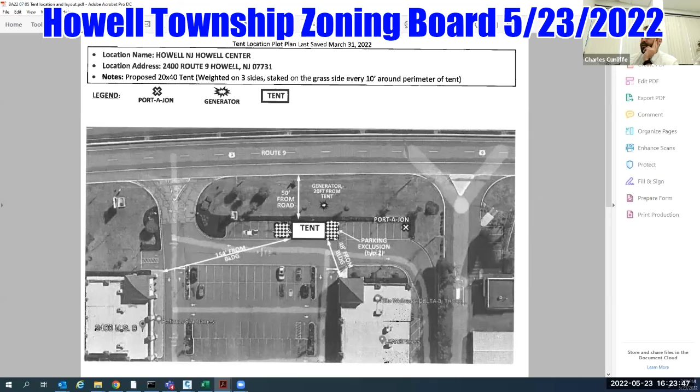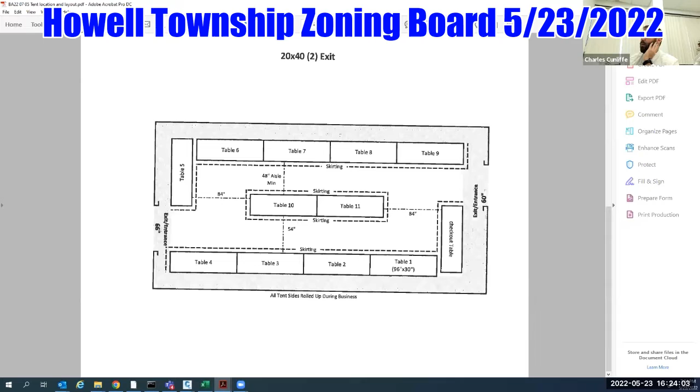So I've just traced the boundary of what the applicant provided, a schematic plan showing where they're blocking out for their tent and then 2 additional parking spaces. This layout, I looked back at the prior applications received for the bowling lanes and also at 19 Petroleum up on 33 and Colts Neck Road. It's a very similar layout, virtually the same footprint that we saw at Howell bowling lanes. Similar to Howell bowling lanes, they blocked out a number of parking spaces.

Looking back at aerial imagery from Google Earth in the last 10 years, I couldn't find maybe one instance where there was more than 1 car parked in this eastern parking bay. So I think this is an appropriate location. If it was internal to the site, it'd be a little bit more questionable.

I would just ask that the final location, it's hard to tell here, but I believe there is an ADA parking space, that the applicant just confirm that the location of the tent and any blocking doesn't prohibit the ADA access. Can you agree to that as a condition, Mr. Middleton? Yes, absolutely.

And then I just want to clarify, I think there was testimony regarding 24-hour security. So 24-hour security is being provided. There's no separate storage container in one of these parking stalls that's going to be utilized at the site. Is that correct? That's correct.

Okay. And then just to clarify for the board, I think Route 9 has a 100-foot right of way. So 50 foot from the center of the median, I think takes us right around where this yellow line, this is GIS parcels, the applicant's location of the generator is somewhere around here. So they agreed to the condition. It looks like they have ample room, but I think that just satisfies it and covers it from the board's perspective regarding any recommendation just from traffic safety.

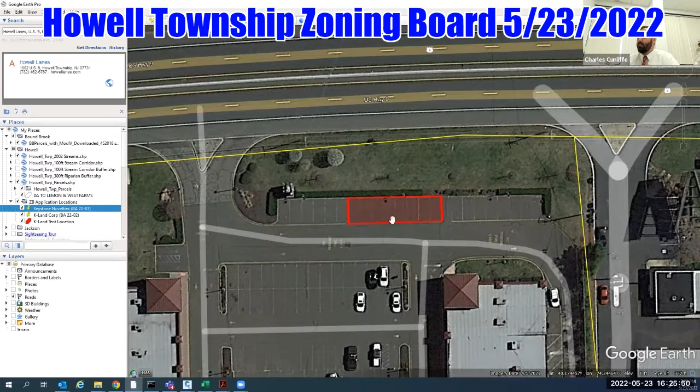I will note that the fire official did issue a letter. Standard comments he's had on the last couple submissions, compliance with the state and federal fire code, fire extinguishers being required inside the tent. The one comment he did is just reviewing this as part of his due diligence, just to make sure that there's no access issues as far as fire for trucks and deliveries, because I think the circulation here is the main circulation through the back of the building for deliveries.

So the fire official might ask for a concrete block that you've seen on temporary seating outside of restaurants or something like that, just for traffic safety perspectives. You don't want a truck driving into your tent with all your fireworks inventory. So I just ask that be made a condition of any recommendation.

And then the last thing, it's sparklers, correct? There's no projectiles that are being sold from the site? That's correct. Using the language of New Jersey law, it's sparkling devices and novelties.

Okay. And then just the last point of clarification for the board. So under 188-165, we're not granting an approval, we're making a recommendation to the governing body. The governing body would then consider the granting of the temporary use permit for a period of 2 years. At the end of that 2 years, the applicant's entitled to come back to the board. We review it again and could make a recommendation for a subsequent 2-year extension to that permit.

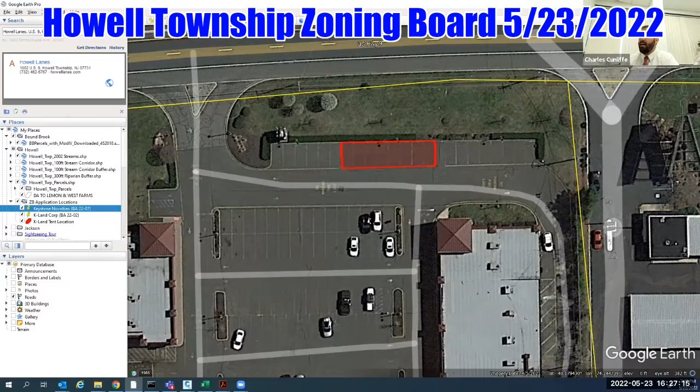So what we're considering tonight is just a recommendation to the governing body for a 2-year permit, and the governing body would be the one that issues the permit based off of our recommendation. So that's all I have, Mr. Chair. Thank you, Charlie. Fellow board members, do any of the board members have any questions at this time?

Just one, Mr. Chairman. Go ahead. 24-hour security, where does that person stay when the place is not open for the public? Inside the tent. Is the person armed or unarmed? Firearms, we don't have a policy. Generally speaking, they're unarmed. I'd be concerned that there'd be somebody armed on the site.

Is that inappropriate, Mr. Chairman? Well, if a permit is issued, law enforcement is well aware of it, and they know when the site is in operation. And so I believe a 911 call would suffice should something like that come across. Okay. Thank you. That satisfies my concern. Okay, any other board members?

Yeah, Mr. May, how was it handled before? Because I didn't remember it being 24/7 security. Is that the way it's always been? Yes, the last 4 years of operation. Okay. And generally, of the 40 tents that we operate in New Jersey, probably 38 of them are 24-hour security.

And I guess that's to alleviate the idea of having to unload everything into a storage thing for the night and then have to unload it again every day. Is that it? Yeah, and an unsupervised storage container is not as secure as a 24-hour security. I concur. Thank you.

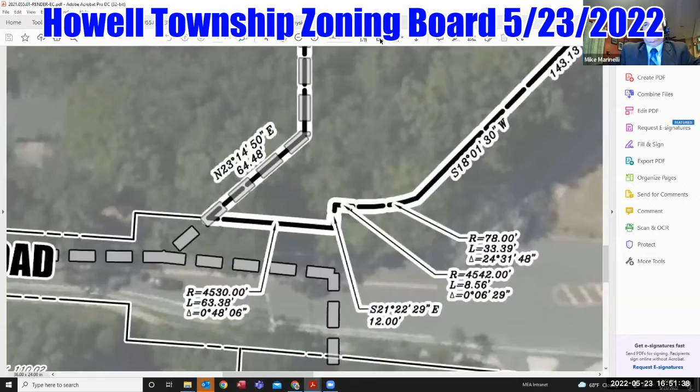Could we go to your next exhibit, the site plan on the aerial? Thank you. And here, in an executive summary fashion, just describe the project. No details, we'll come back to details. Surely. So the applicant proposes a three-story, 79,089 square foot self-storage facility. The building is approximately 40 feet tall.

We've provided, as I said, access off of Sunnyside Road via a 25-foot drive aisle with 20 90-degree parking spaces, and one-way circulation around the eastern, northern, and western sides, which would access loading doors for the self-storage facility. You can also see we've penciled in areas for infiltration and detention along the south and eastern sides. And we've maintained the wooded area along the northern and western sides where there is a 50-foot residential buffer.

If you could take us to your next exhibit, I believe the site plan itself. Am I correct? The amended site plan? Oh, thank you. Board members, during the course of reviewing this project with your professionals, we learned that the footprint of our building was creating variances that could be eliminated if our client reduced the size of the building. Mr. Marinelli, using that red line drawing, if you could just describe the footprint revisions, and then with permission, we'll go back to the colored site plan to make the balance of the presentation.

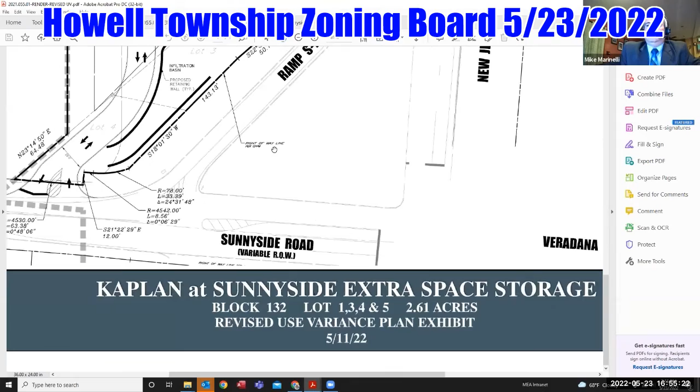And so we took the opportunity to revise the site plan, and now I'm referring to exhibit A15, which is again the revised use variance plan exhibit dated 5/11/2022. If we were to reduce the footprint of the proposed self-storage facility 5 feet on both the north side and the west side, we would be able to bring all disturbances and amenities, including the catch basins, the fencing and the perimeter landscape, out of that 50-foot residential buffer. That building would total 73,839 square feet, which is again 3 stories over a 24,613 square foot building footprint.

Mr. Marinelli, thank you. And to the board, please consider the applicant's request to be so amended, and please consider the revisions shown by Mr. Marinelli to be part of the commitment of the applicant to the board. Now, if we return to A16, knowing that there's a slight dimensional change that will be on the final plan, if you could use this to take us through just a couple of things I'd ask that you focus on.

One is that if you could confirm that you've spent some time working with Mr. Charlie Cunliffe on the stormwater, and that it's your understanding that the conceptual stormwater design that you've presented is in fact acceptable to his office. That is correct. And at any time, if Mr. Cunliffe wants to jump in and comment, we certainly will take no umbrage.

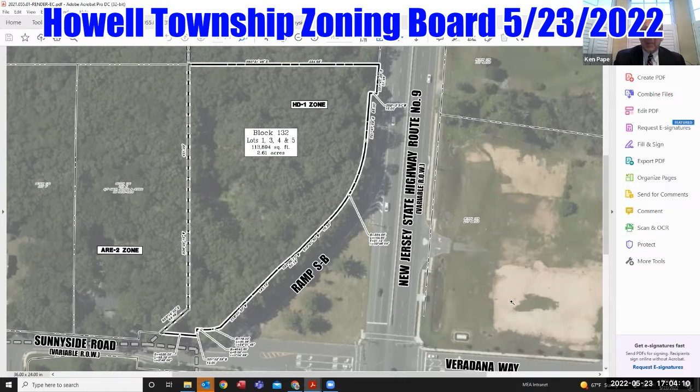And Mr. Chair, our goal is to landscape the property wherever possible with enhancements to the buffers and to landscape around the perimeter. And to the extent that we can do that in a responsible manner, that is our goal. To the extent that there's greater trees required to be replaced, we would ask for permission to participate in the tree fund. Thank you, Mr. Pape. Thank you. I mean, that's a waiver, Ken, so you're gonna have to formally request a waiver to go into the tree fund. It's not just 'we're looking to'; you have to formally request a waiver. The board has to approve a waiver for you to pay into the tree fund.

Thank you for the clarification. I would indicate if this project progresses to site plan, and we hope that we earn that right, we would agree to do the formal woodland management plan, calculate the trees, create a landscape plan, and request a waiver for that which didn't fit. If I may proceed, Mr. Chair? You may proceed, Mr. Pape. Thank you. Michael, knowing that Carl Penke's coming up, if you could briefly describe the on-site circulation system, the locations of parking, and the locations of building loading. So before we get there, Ken, can we talk about the buffer requirement that you do not meet, which is along the frontage of the property? Sure.

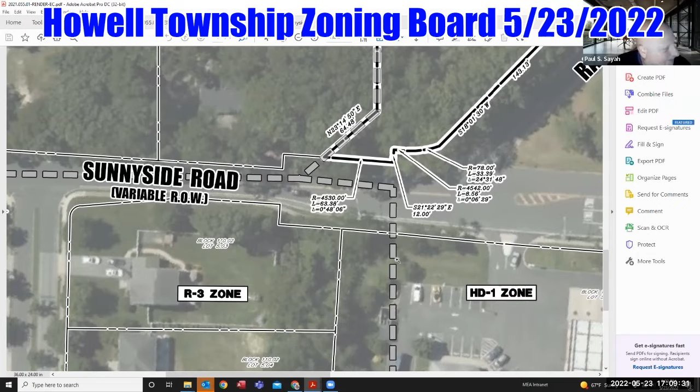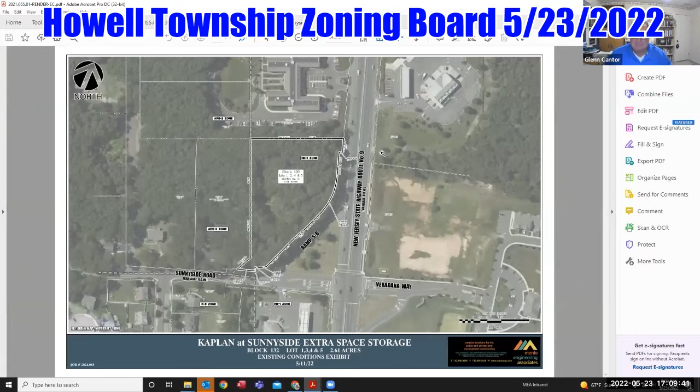Board members, I just want to make sure you're making note of both of those technicalities. I'm good with them. Thanks. You're welcome. So noted, Mr. Chairman. Mr. Pape? Chair, if I may return to Mr. Marinelli. You may. Good. Mr. Marinelli, we were just very briefly to grade this site to accommodate the development. If you could just give the board an executive summary of what's necessary to prepare the site.

So as I said before, the site in its existing condition is relatively flat, and because we're putting in a footprint in the center of the site, we wouldn't be drastically changing grade through the site. As far as circulation goes, there's a full access two-way 25-foot wide drive aisle that accesses Sunnyside Road on the southwest corner of the site. That driveway heads north to the front of the building, where you make a right turn towards the east. There are 20 perpendicular 19 by 10-foot parking spaces along that two-way 25-foot wide drive aisle.

As you continue along Route 9 in the northerly direction, there is the proposed access gates with keypad. This entry will allow you into the secured area where the garage door locations are, as well as the main entrance for the upper floors on the western facade. You'll hear more detail on that from the architect. The eastern, northern, and western portions of the building are proposed to have a security gate around them. On the eastern side, the drive aisle continues 20-foot wide between the building and curb line.

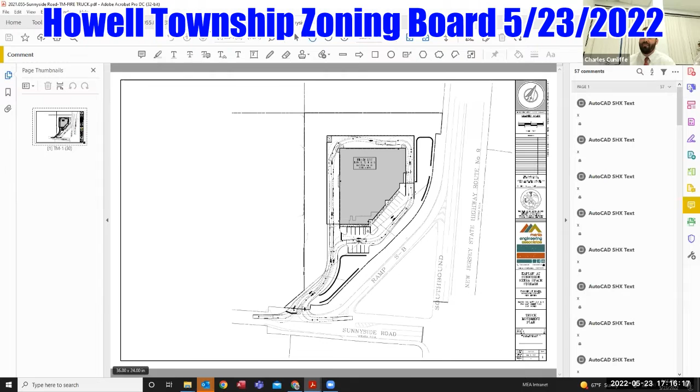So while this can show that a fire truck can circulate the site, I think it's important that the building will be sprinklered. So I don't know that a fire truck will actually physically maneuver around this site in the event of a fire, but this demonstrates that it can. And then just from an emergency access perspective, ambulances, I think fire code requires a minimum 20-foot wide two-way cartway. So even with the gore striping, they've got 20-foot wide one way. So even if it's not a fire truck, it should be accessible for ambulances and other kinds of emergency vehicles. So I think that's important for the board's perspective. You can continue, Mr. Marinelli.

Well, I appreciate that clarification. Yeah, we were showing the fire truck as the most conservative of the emergency vehicles, obviously, but that lends to ambulances also being able to maneuver the site, box trucks and delivery vehicles to be able to enter and exit the site. We're not proposing that any tractor trailers be able to access and maneuver at this location. There'll be further testimony on that from Mr. Pankey. If you could talk a little bit about the landscaping and the lighting.

The landscaping plan that we have is strictly conceptual, Mr. Chair and board members. I've asked that Mr. Marinelli confirm that he's reviewed the staff reports, and the conceptual guidance and direction that appears in your staff's reports with regard to landscaping will be followed at the time of a site plan application, if we're so fortunate as to progress. Mr. Marinelli, if you just briefly confirm those statements. That is correct.

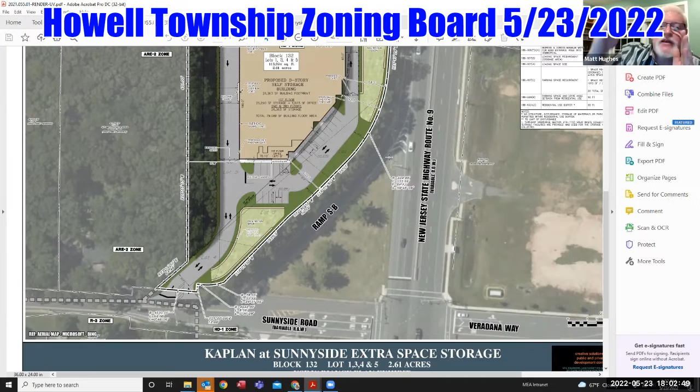Now those two, I'd call it restricted drive, the north and the west, the gated area where you have the roll-up doors. Is there going to be any restriction on box trucks, either parallel parking or backing up to the doors? I think if they back up, they would kind of block the drive aisle for emergency vehicles, wouldn't they?

Yeah, so the way the building's laid out functionally and will operate is that you basically have a parallel parking lane along the building. So you would pull up to your door parallel to the building, not blocking the aisle, and unload into your facilities. It's actually the same exact design that you have at the U-Haul facility up the road. And as I said, this is an industry standard. We don't design them and set them up to back into the doors. It's all parallel layout.

Okay, wonderful. I just wanted to make sure there was some kind of agreement on that. I think cars and things like that could probably manage it, but a truck couldn't. All right, thank you, sir.

Yeah, and as indicated, the facility during daytime hours does have managers on the site, so that is being watched. So if there's an issue, that is something that is quickly corrected by the management of the facility, and in those off hours, the frequency of people on the site is extremely low. So I would imagine that all the cameras on site probably have a viewing area so they can keep an eye on all around the building live, correct? In the office. Yes. Okay. Thank you, sir.

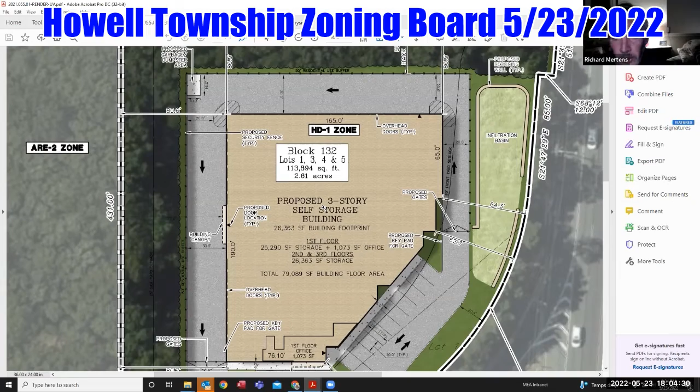Board members, any others? Yeah, I just have one. If we could bring the screen down till we get to Sunnyside Road, if that's possible, at the entrance. Okay, you have like a pickup truck with a long box trailer coming in, making a right off the ramp and getting into the entrance. Do you feel comfortable that truck can make that turn into the site if you have a car exiting at the same time? Yes, they should easily be able to make that swing.

The ramp is a bit of a distance away. There's probably about 40 feet between the ramp and a radius, so a box truck should be able to easily make that maneuver. Okay, yeah, because now I'm looking at the screen a little bit more, and I can see that the ramp is a little further away. Just the tone of the picture, it seems like it's closer, but it is actually a little bit away, and the ramp actually has a really little radius to it. So a truck or vehicle that's coming down the ramp is already well positioned as he makes his turn. It's not a 180-degree turn from that standpoint.

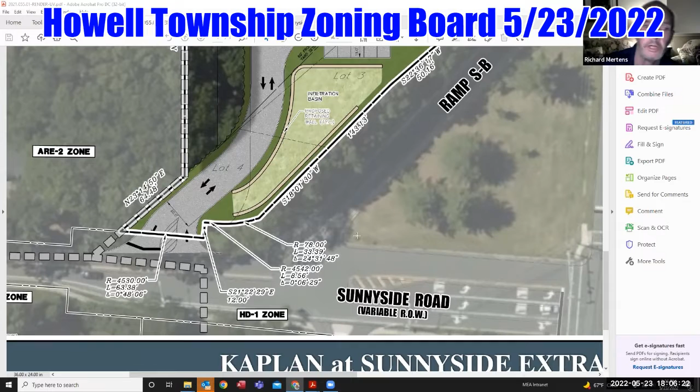Okay. And if a car is going to make the U-turn and actually go east on Sunnyside back towards Route 9 to make a left onto northbound Route 9, I'm quite sure there will be two turns at the end of the ramp. So one would go west and the other would allow the traffic to go towards the east. Is that right? Yeah, the existing ramp is striped with a 2-lane approach, separating the lefts from the rights. Okay. And I think Matt asked the other question about the vehicles parallel parking. That was my other question, but that was taken care of. That's all I have for now, Mr. Chairman.

Thank you, Mr. Mertens. I see what you're saying, Mr. Mertens. Perhaps if there's not a yield sign there when you're coming off the ramp, there should be one, right? Yes, absolutely. Okay. Just for the record, I quickly bopped over to Google Earth. There are yield signs on that ramp exit, both sides. Ken, would the applicant be amenable to looking into a driveway ahead sign or something like that coming off the turn there? Obviously, it's probably subject to DOT because it's their right-of-way, but. Sure. Excellent idea. I would suggest that Mr.

Pankey and you could work on what we would present to the DOT for their approval. And then also kind of on the parallel parking note. So obviously the fire official issued a memo about fire lane striping and signage needed to be designed at the time of site plan. The applicant will comply with that. Yes. And then would the applicant have any issue with agreeing to Title 39 enforcement on the property? No, Title 39 is going to be our request.

And there's also some fire hydrant and FDC recommendations of Chief Lewis. We can put those on the record too. Okay. And then the last thing from a traffic/access perspective, on the northeasterly side of the property, there's an existing curb cut probably for whatever the prior use on the property was. Would the applicant be willing to abandon that curb cut? Northeast, yes. Right there, there's an existing curb cut and an asphalt apron that goes into the trees. Sure. I think we would be removing that as part of the highway occupancy permit for the sidewalk, so that would become part of the highway occupancy permit to do that work.

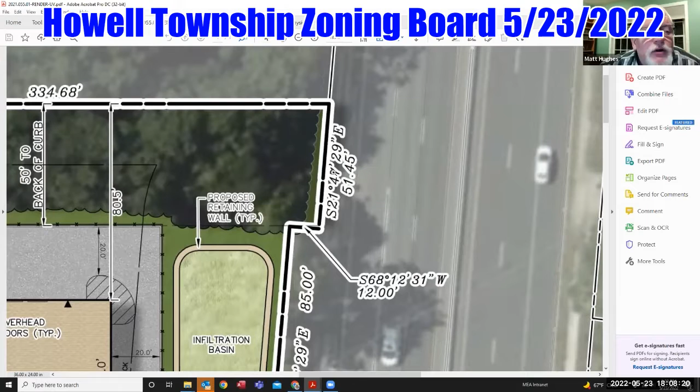Yes. Kind of off topic of traffic real quick. I assume this is city water and sewer, correct? For the fire sprinklers? That's correct. I didn't go into detail with proposed utility, but there is electric, gas, water, and sewer all available in Route 9 and the ramp. Okay. Thank you.

Okay. Any of the other board members? Nope. Okay. Jen? We haven't heard from you, Jen. Do you have anything? I know, I've been very quiet tonight, but no, I have no questions for this witness. Okay. Mr. Chair, can I request 5, please? I second that. Okay, so the board's gonna take 10 minutes and we'll be back, Eileen, at 9:20, okay? Very fine. Meeting will take a short break and reconvene at 9:20.

Okay, Mr. Pape. Yes, Mr. Chair. I believe we're gonna go on to the next professional. Very fine. We're all here? Yep. Okay, thank you. Mr. Chair, board members, the applicant's next witness is Stephen Radosti, the architect who's responsible for the design of the building. Mr. Radosti has testified before this board previously. He is under oath, but I'll ask that he share with you his credentials and confirm his license is in good order before testifying. Mr. Radasti. Yes, I'm a licensed registered architect in the state of New Jersey. I graduated with a Bachelor of Architecture in 1992 from NJIT, and in 1996 I became a licensed architect. I'm a principal at Perez and Radosti Architects, and I have testified in front of this board, as well as dozens of other boards throughout the state of New Jersey. Yes, you have, Mr. Radosti. We accept your credentials. Thank you.

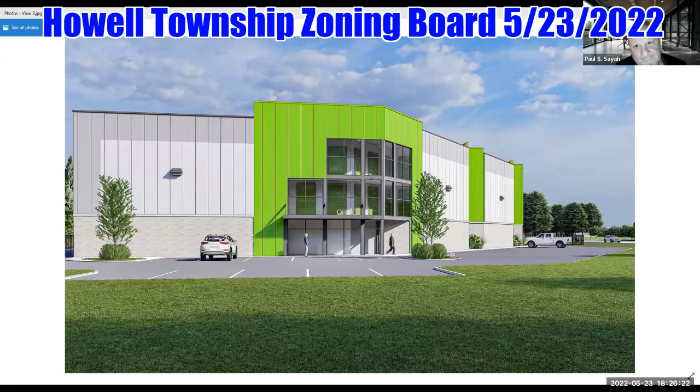Okay, I have here view number 4, which is also part of the same exhibit, A7. And the sign that I was talking about is here. This is extra. Steve, you didn't change your share. I have to, okay. Sorry there. I'm going to stop sharing their individual files. So now I'm going to share the screen.

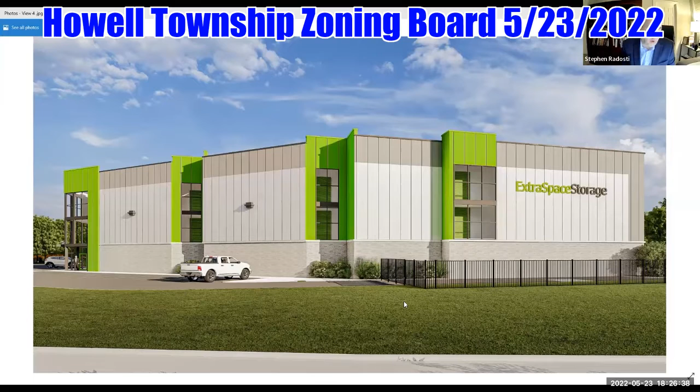Okay, I have here view number 4, which is also part of the same exhibit A7. So the sign that I was speaking of is here, where it says Extra Space Storage. This sign is 3 feet in height by 32 feet in length, for a total of 96 square feet. The cutouts that I was speaking of are in the floor plans here and here, and they create these vertical elements that give jogs in the plan, as well as some visual interest by adding some of the accent color vertically, as well as more of these windows.

Through the windows, you can see into the space, and you will see green colored overhead doors that allude that the building is a self-storage building. We have that same brick water table that extends throughout the entire building along the bottom course. So we have vertical elements as well as horizontal elements. Steve, I'm going to jump in and ask you a couple of pointed questions. Sure. Mechanicals servicing the building, are they all roof mounted? That is correct. Are they all behind the parapet? Yes, they will be. The overhead for the elevator, again, roof mounted? Yes, the elevator shafts will not be visible beyond the roof parapet.

And the overall height of the building is, Steve? 40 feet. 40 feet is the total height of the building. That is correct. You've heard testimony earlier by other witnesses about security systems; is your building going to be designed to incorporate all of those security systems? That is correct. And you've heard our commitments to the fire chief's requirements with regard to FDC connections; you'll comply with the fire chief's request? Yes, I will. And there's a third sign. There is the one Extra Space Storage identification sign. You showed us the letters over the door that have the word office. There's one more sign on the building that says the word loading. Can you bring that one up? Yes, I can.

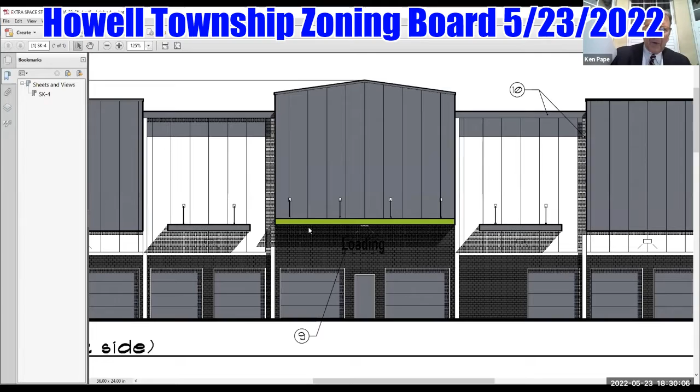Okay, I have here exhibit A13. This is sheet SK4 dated 5/16/22. I think you're going to have to zoom in or we're not going to find that word. Oh yes, I'm zooming in as we speak. So this is the west side of the building, the left side, and we have here the 2 loading doors. Above the 2 loading doors, we have a green canopy to draw attention to the common loading doors, and then we have the sign that says loading. That sign is 11.5 inches high by 5'10 5/8" long, for a total of 5.6 square feet. 5.6 square feet for the word loading, 3.36 for the word office, and one sign just under 100 square feet. That sign is designed to be compliant with the ordinance's requirements for percentage of facade coverage. Is that correct? That is correct.

So let me just get this straight. You're assuming that people that see these big garage doors aren't going to understand that that's where the loading is. So you need a sign that says loading, and you need a variance to put that sign up. Well, some of these doors go directly into individual units. Come on, let's be honest. You need a variance for the number of signs. Yes. This sign is unnecessary. People are not that stupid. There's no need for that sign. So Ms. Cafone, good luck with that, because this is not a sign I'm going to support. There's no reason for a sign that says loading above garage doors that scream loading. Ms. Beam, point well made. This sign is withdrawn. Thank you. And you overestimate the intelligence of people.

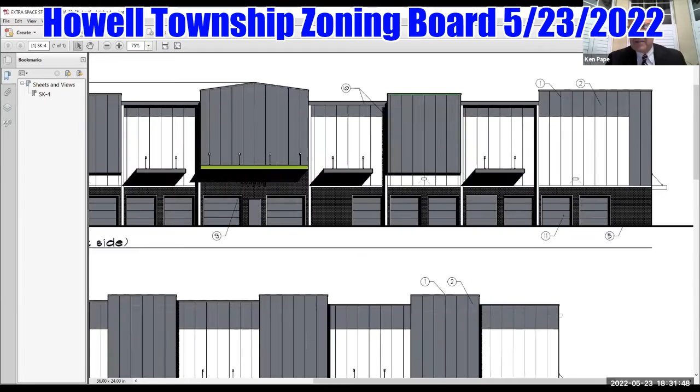If we may, I think here's an important one, Mr. Radosti. Please confirm this building is fully fire suppressed with a sprinkler system throughout. Yes, it is. Okay. So it'll have the security system, it will have the sprinkler system. Please confirm that you've done more than one of these, that you're familiar with the construction codes that are applicable, and this building would be 100% compliant with the construction code requirements for self-storage.

Yes, I'm very familiar with self-storage buildings. I have designed several of them, and several are on the boards at this time. I'm very familiar with the International Building Code 2018, which is the current code in the state of New Jersey.

And one last topic. I know that early on, you presented a couple of versions of this building to Ms. Beam for her comment. I do know that there were two sides of the building where you didn't gain support from Ms. Beam and you redrafted the plans. If you could just describe the changes that were made, and then I'm going to really take a risk and ask Ms. Beam if she's satisfied with what you've done. I'm going to save you the time. I am satisfied with the work that he's done.

Thank you for saving us the time, Mr. Chair. I'm going to take that as an invitation to wrap up and to say that is Mr. Radosti's testimony with regard to the building design and its features. He is available to you.

Great. Mr. Radosti, I have a question. Yes. Where are the mechanicals for the HVAC in this building? So the mechanicals would be mounted on the roof behind the various parapets that we have. Okay. And so maintenance will be done on a regular basis, I take it? Yes, maintenance for those units. Maintenance people would have access through the roof, through the top level of the staircase. There would be a 4x4 access panel where they could access the roof unit. Okay.

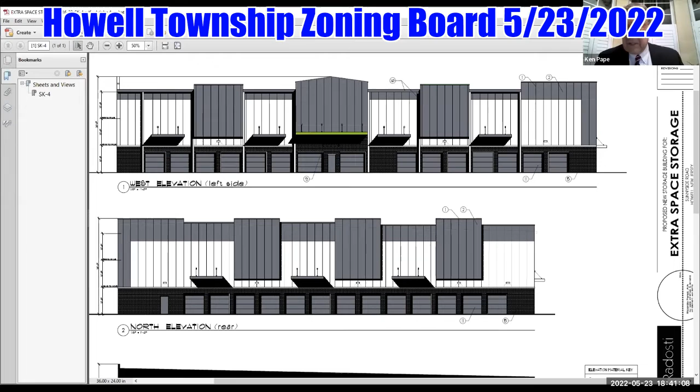Yes, Mr. Chair, board members, the final professional witness to testify this evening is Christine Cofone. Christine Cofone, a professional planner, always testifies last because all of the facts that have been shared with you by the first four witnesses are important facts for her to utilize to draw her opinions. I'm going to ask if Ms. Cofone has been sworn, and if we take just a few moments to place her credentials on the record before she begins her substantive presentation.

Ms. Cofone. Hi, good evening, everybody. For the record, Christine Mazzaro-Cofone. I'm a licensed professional planner. I've been practicing for about 27 years in the state of New Jersey as such. So during that 27 years, I've been qualified in Howell on many occasions and well in excess of 400 or so other planning and zoning boards throughout the state of New Jersey.

I currently serve as an affordable housing special master in about 24 municipalities. I teach planning and zoning courses for the Rutgers Center for Government Services, where I'm an adjunct instructor, and I am the appointed planner for the Casino Reinvestment Development Authority in Atlantic City, and my licenses are current and valid. We accept your credentials, Ms. Cofone. Now, with regards to this application, please be clear so that the board members understand what it is that you're presenting to us.

I will do my best, Mr. Sayah. So to be clear, the reason we're here before your board, the zoning board, is because the subject property is located in the HD1 highway development zoning district. While that is a very permissive commercial district, it allows such uses as offices, financial institutions, healthcare and medical centers, hospitals, restaurants without a drive-through, restaurants with a drive-through, entertainment uses, retail services, tattoos and body piercings, indoor recreation, breweries, craft distilleries, assisted living facilities, and other similar type intensive commercial uses.

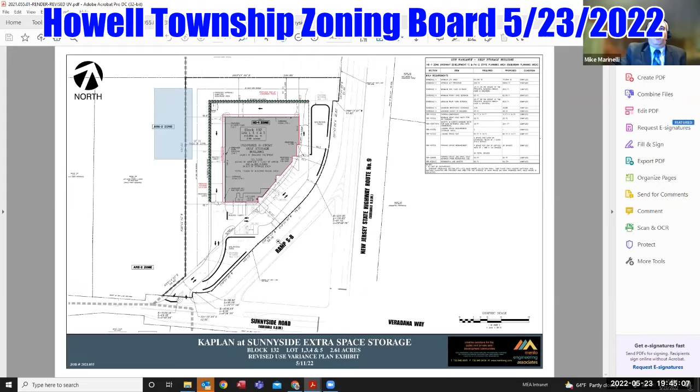If I could refer to, I believe this one was A15, where we cut the building back by 5 feet. We were able to provide a row of low-lying evergreen trees that would help supplement that buffer with year-round greenery.

If I may, Mr. Marinelli, earlier on, I heard Ms. Spiro state that that area will need to be improved. So in addition to what you're describing, I think we should share with the board and the public. We know that we have to satisfy Ms. Spiro and this board at site plan, and we know that we will be doing infill planting throughout that area. So in addition to saving the trees, you'll be doing infill planting.

That's accurate. And what we intend to do as part of our site plan application, should this application be acted on favorably this evening, is to go out and do an actual tree inventory, see what's there, what needs to be supplemented, and provide adequate supplemental plantings in order to improve that existing 50-foot buffer.

Before you go on, Eileen, if you can, there should only be one panelist in at a time in terms of public participation. So if you could make sure that's the case.

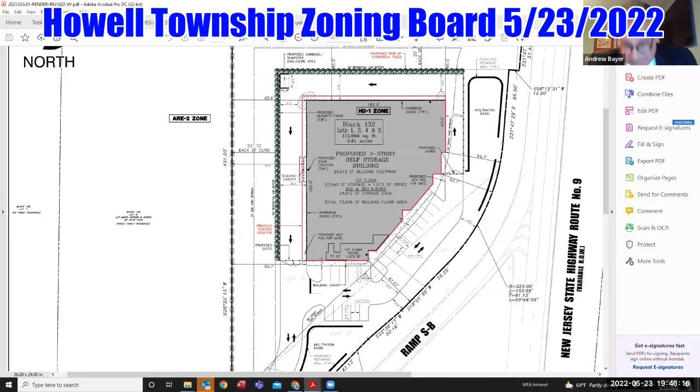So just Ms. Amato should be in from the public right now. And that answers my question. I appreciate everybody's time. Thank you. Well, congratulations. Thank you. Well, wait a second.

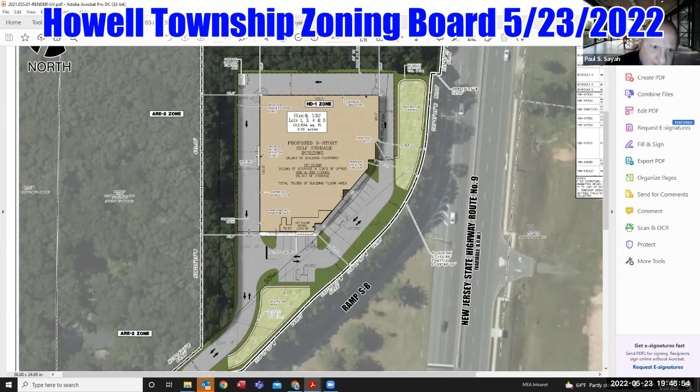So, Mr. Pape, we put up there the buffer, the 50-foot buffer, right? Yes, sir. And when we look at where the house is and so forth, would we be willing to put up on the entranceway, as it gets to the 120-foot distance, at least a solid white fence to block off the traffic that would be in Ms. Amato's viewpoint? If Mr. Marinelli could restore the screen, just so I can make absolutely certain that I understand the question, I think this one's going to be an easy one to answer.

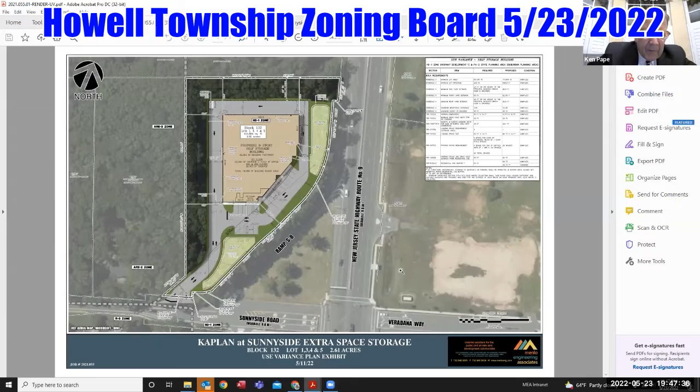Mr. Chair, I think that you're talking about where there is that angle. That's what I'm talking about. Absolutely, even that and maybe even 20 or 50 feet back, so at least there's some protection for that household right there. I would just note that, similar to the fencing that would be required along the retaining walls per Mr. Cunliffe's comments, that would also generate a design waiver requirement approval.

I would say the same thing, Mr. Chair. I think it's an excellent idea. That could be considered, yeah. In order to implement it, we'll need to ask this board for some waiver relief, and we'll be prepared to include it and ask for that relief when we return, if the board allows us to move forward. Ms. Amato? That would be great. Thank you for advocating for us. I would appreciate that. You got it. Ms. Amato, do you have any other questions? I think that's it. Thank you. You're welcome.

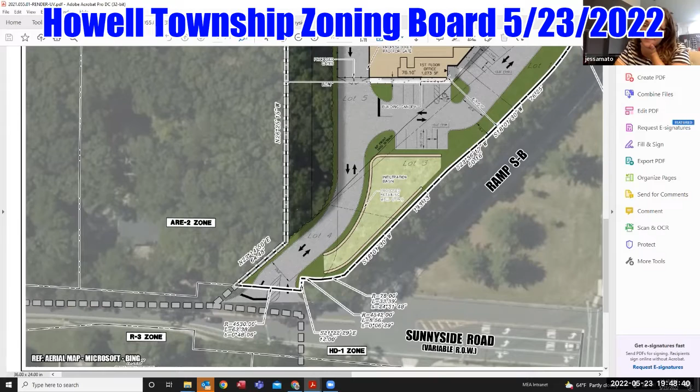Eileen, do we have anybody else in public? No, no one else in public is raising their hand. Okay. So, members of the board, it's getting late. Can we have a motion to close the public, please? Motion to close the public. Second. Okay, all in favor? Aye. All right.

All right, before Mr. Pape gives us his summation and so forth, there's a couple of things that have come from the residents, right? And one has to do with the signage. Charlie, is it possible to fix the signage to limit the types of trucks that come into the site, yay or nay? On the site, yes, they can certainly post signs at the entrance on the applicant's property restricting tractor trailers from entering the site. But as far as Sunnyside Road, that would be a municipal jurisdiction thing.

And so, Mr. Aguirre, would you advocate for that with the municipality to get those signs up for us? Yes, Mr. Sayah. I would just be advised, you put speed signs up and people still speed. You put lights up and people still run red lights. If it's something that the board so wishes, we definitely would advocate on property or even on Sunnyside, but whether it's going to control the actual movement of that type of traffic into the neighborhood remains to be seen. But it's a resident's request, so that's what we're asking. I have no issues with that.